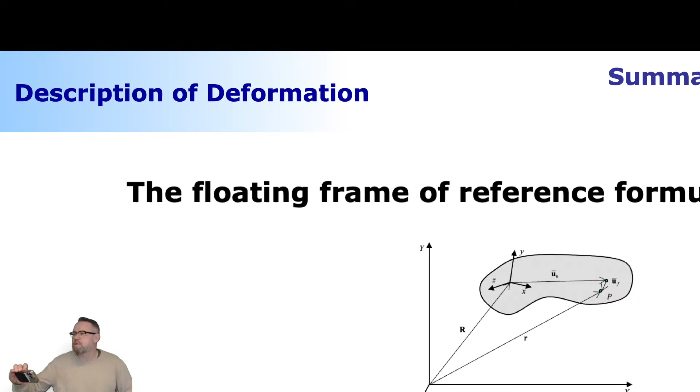Nothing comes out like this. If I say Windows... I don't want to use this either. If I use display, it goes like this. Okay, I think it's now finally working properly. Yes. But is it cutting? It's a little, yeah, not perfect setting yet. One more thing needs to be done. Like this, and now it's going to be perfect.

Okay, so the projectors are not working, mics not perfect, but we don't care, we're still gonna go.

I was about to explain that we're going to make a combination of finite element modeling by describing the deformation you see here. If you take a close look at how things are here, you have the particle's original location, described by vector u bar 0, and then there is something that describes the deformation, which is u bar f. This u bar f is the one coming out from the finite element modeling. Now, important lesson: this u bar f is with respect to the body reference coordinate system.

So when you do it like this, finite element modeling does not need to care about large translations or rotations, which is great because finite element modeling, as described here, is unable to describe large rotations. It can describe large translations, but if you look at the kinematics this is based on, it just cannot describe large rotations. It can describe small deformation and small rotation with respect to the body reference coordinate system. There are specialized finite element codes where large rotation can be accounted for, but in its conventional form, finite element modeling cannot take that into account.

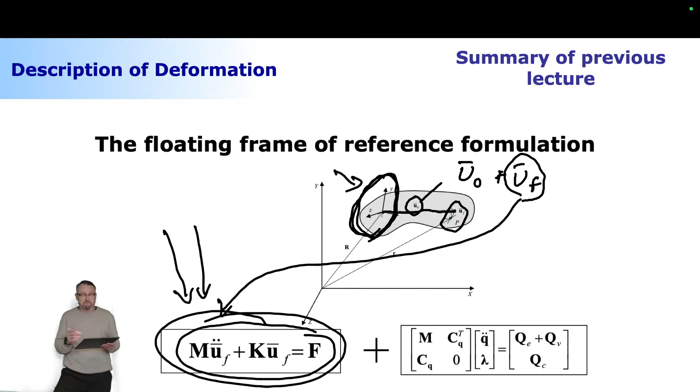There are actually several different ways that you can force finite element models to describe large rotations, and again, the most common source of nonlinearity is large rotations. So the conventional finite element model is not very good at describing large rotations, but that's fine, because those will be accounted for by using multi-body system dynamics. That's the way to go.

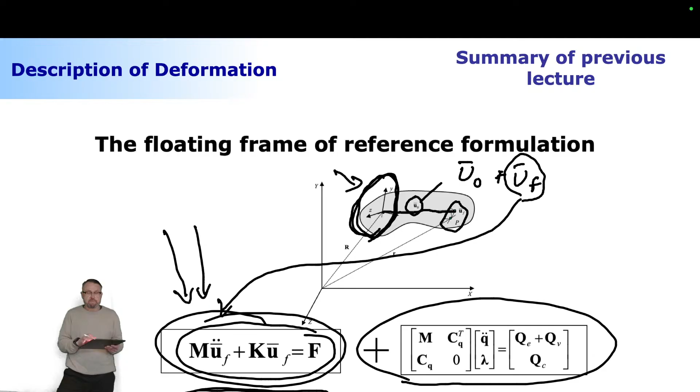We learned that finite element modeling is typically based on polynomial expansion. It could in theory be something other than polynomials, but polynomials are used because they are mathematically very pleasant - easy to differentiate and easy to handle in many different aspects. Maybe differentiation is the most convenient feature, because we do need to differentiate the polynomials with respect to different coordinates, and it's easy to conduct.

Now, how it goes in our finite element modeling: we first need to develop the elements that describe how the piece of structure behaves. A piece of structure is connected to surrounding elements by things called nodes. These nodes have a certain number of degrees of freedom. In the simplest possible form shown here, they can only move left and right, so each node has 1 degree of freedom. This has 1 degree of freedom, that has another, so in total it's a 2 degrees of freedom element - the simplest possible element.

What you need to do is select the polynomial from your Pascal's triangle such that the unknowns represent what happens between these nodes. Finite element modeling is all about what happens between the nodes. That's extremely important to understand, because sometimes you hear this explanation that finite element modeling only focuses on nodal degrees of freedom and you have no idea what happens elsewhere. It actually came the other way around - you first started to describe what happens between the nodes, and you make them physical in terms of nodal degrees of freedom. So these nodal degrees of freedom are interpretations to see what happens internally in elements. That's what they're for.

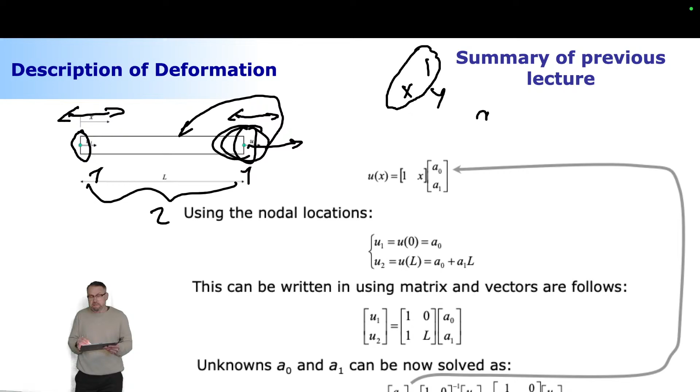They tell you that if you introduce a displacement to nodal degrees of freedom, how do the particles follow that? But in an element like this, we did not start from the nodal degrees of freedom, we started from the polynomial expansion. In the polynomial expansion, we need to select 2 unknowns from the Pascal's triangle as shown here - you select A0, and A1 multiplied by x. If there's an internal node in the middle, you select another component, which could be x squared, or in the next row x cubed, and so on - so then you have more unknowns.

These unknowns will be replaced by nodal degrees of freedom. You replace them by first expressing polynomials and their multipliers as shown in this part of the slide. Then you take whatever information you have about nodal locations into account, and you get the relation between the nodal degrees of freedom and the polynomial unknowns.

Now the next step is solving the polynomial multipliers by inverting this matrix here. Remember the story about when I was struggling to invert the element matrix? That was a 48 by 48 matrix, and that was a miserable time in my life.

So that was when I was a postdoc in Chicago. Eventually I was able to do that, but it was all about how to select these polynomials from Pascal's triangle. And it wasn't straightforward. It was a polynomial where the coefficients weren't selected in a row, but almost randomly.

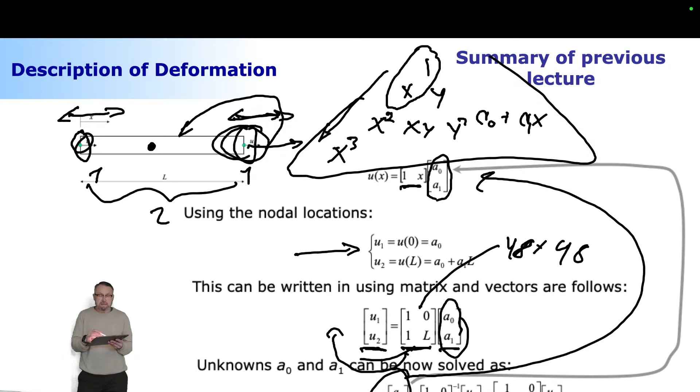Anyways, now I have a 4 degrees of freedom element, so I need to select my polynomial expansion as shown here, with 4 components to make them match. How did I select them? I selected each of them based on this. So if I could change the color here, I selected this one, a constant value, and this one, because if I don't select this, the element isn't capable of moving without introducing strain.

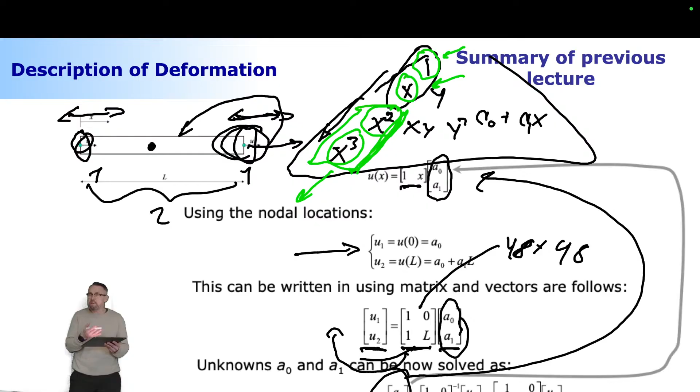This one is needed, because otherwise the element cannot introduce constant strain. The rest you can select the way you want, but I selected this one and this one. Instead of these two, I could select something further down in my Pascal's triangle, and I would get different shape functions describing differently how the element deforms. So in short, shape functions can be considered as the ways the element can deform.

The special feature of the shape functions shown here is that they introduce displacement to 1 nodal degree of freedom at a time. So if you look at this, the first degree of freedom is moving the left end in the y direction. And when you do that, each of the particles will follow this polynomial pattern. This polynomial pattern is significant in the sense that if you compute the slope here, which is my 2nd degree of freedom, the slope here is equal to 0.

As is the displacement here on this right end, that too is 0, and the slope here, when you take a close look, that too is 0. So it's introducing the displacement to 1 nodal degree of freedom at a time.

And what I said incorrectly a week ago, I said that the shape functions are orthogonal, meaning that mathematically they have no relation to each other. That's not the correct statement. That was incorrect.

So the correct one is saying that each of them introduces the displacement to one nodal degree of freedom at a time, and one only. This is the second one, which is the slope. You see that displacement here is 0, displacement here is 0, and slope here is 0 too. This is the way it behaves.

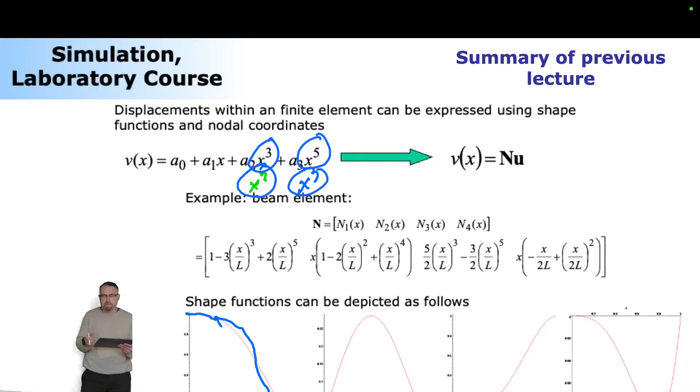Well, I will get shapes that are different than they were earlier. They have a little bit more curving behavior compared to what I got a little while back. So you can kind of manipulate the way the element can capture the deformation. This may not be clear to you, but if I make a comparison, this was based on x power 2 plus x power 3, and this was x power 3, x power 5. You see that this is more violent deformation.

Which one is performing better? It's a little hard to tell, but in element technology, many of the good elements are based on polynomials that are not selected in a row. These are non-harmonic - I don't remember what they're called because it just disappeared from my head. But the risk you might take when selecting this type of polynomial is that your convergence may not be from one direction only, but might fluctuate a little bit.

Yeah, this is something I need to explain. This again is the x-axis, which is the number of elements. This is your correct solution. So when you're selecting this kind of polynomials, it's possible that your solution goes like this. Not typical, but in theory it's possible. It's still converging, but not in one direction only.

When you have a typical displacement-based element like this, it's always converging from the rigid side, like this. Rigid side means that if you have not enough elements, your solution is deformation-wise lower than the accurate value. So it's almost stiffer than the actual behavior. It's always approaching from the stiff side, which in some sense is a safe solution.

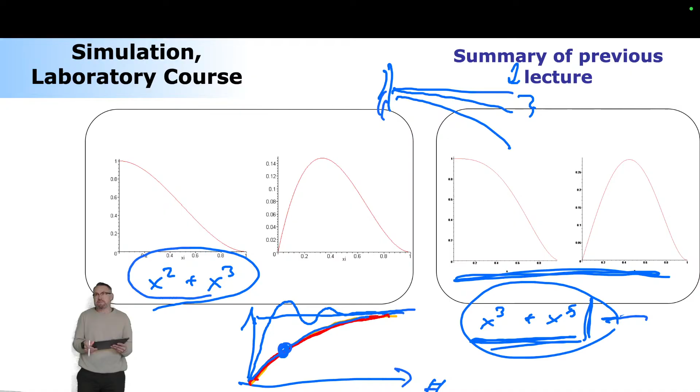All right, now my first in-class quiz: what is the physical interpretation of shape functions? The options are: shows the way an element can deform, defines the rotation of the particles - revisiting something that was my favorite in simulation of mechatronic machines - defines strain displacement relationship, or no clear interpretation. Those are the four choices.

Let me just double check. I'm a little scared to touch this computer because it's kind of...

Okay, so I got comments that the voice is not great. I hope that it's still understandable.

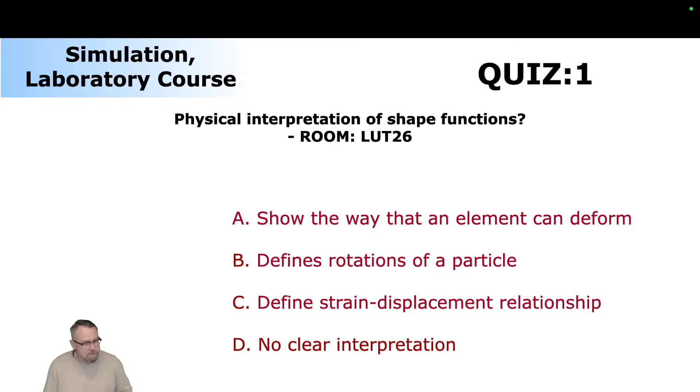All right, I will leave you guys to think about this, and I'm going to go back to my PowerPoint presentation. Now here comes the main lesson of today. What we can do with finite element modeling is put together something called equations of motion, limited to small rotations, and it consists of several components.

It consists of inertia forces, which is mass multiplied by acceleration. It consists of something we have not learned earlier, called elastic forces, which is stiffness multiplied by displacements. And then the last component on the right side of the equation is external applied forces. So this is the dynamic equation.

This is a dynamic equation to study structural strength. In structural strength analysis, it's very common that the inertia component is ignored, and we're only looking for statics. In a case like this, the equation or equilibrium reads like this. I'll just call this F, meaning these are the external applied forces.

So what we do in finite element modeling is invert the stiffness matrix, and when we do so, we can solve for the displacement. Displacement can then be used to get the strains, and they can then be used to get stresses.

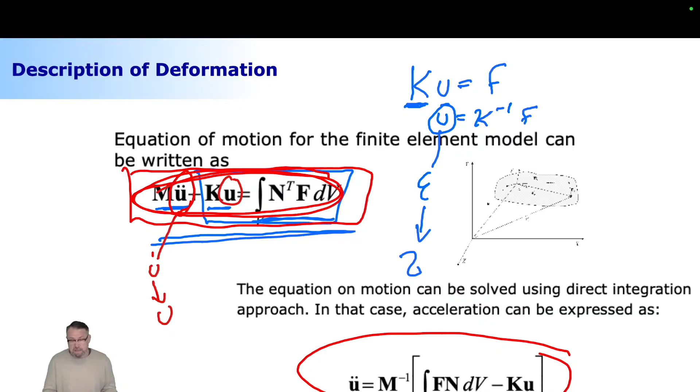This is what I'm going to explain to you next. And I'm going to spend some time to make sure we fully understand this concept, because once understanding this concept, that's pretty much all you need to know from this course, theory-wise.

Again, we cannot make use of this one because the dimensions are simply too high. There are too many degrees of freedom, so it's not going to be easy to use it as it is shown here. It's actually extremely hard to be used like that.

So these are the questions we're going to revisit a little later. So what I will do is jump from nodal degrees of freedom to modal degrees of freedom. And these two spaces are related based on assumed deformations.

So what are the ways that the entire structure is assumed to deform? Again, this is the entire structure, how that is assumed to deform. This is the one that relates these two spaces together, nodal and modal spaces.

All right, so I do have an accent, so I don't know if you can hear the difference between nodal and modal.

Nodal, modal - or is it like... Say, doesn't make a difference. Can you hear the nodal? That's note, modal is a mode. You hear the difference? I'm not sure if I hear it myself, because deep in my mind it sounds like... Okay.

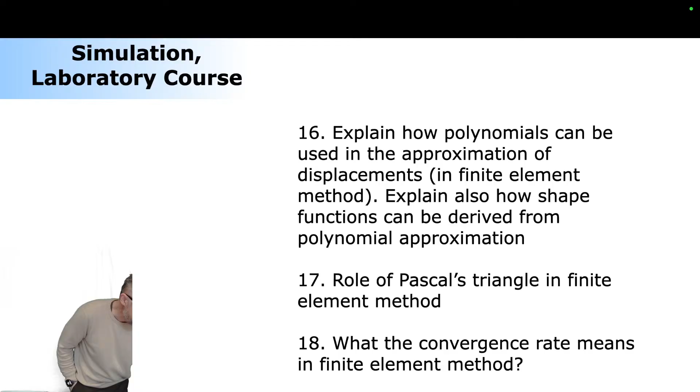In the previous slide there was a power of t to the shape function, but in the second equation it suddenly disappeared - why is it so? Can you say your question again? I don't see this in this one. One slide back, yeah. I see that this is what they are wondering - this transpose operation of shape functions. Yes, the correct way to do it is this one. This is a typing mistake here, so they shouldn't be in this order - they should be like shown here.

You know what this is doing - there is a possibility that you have a structure like this beam-like structure consisting of 3 nodes. It may be the case that the force is not touching any of these nodes, but is geometrically in the middle of these 2 nodes, or let's say it could be 1/3 like here. You need to express this force in terms of nodal degrees of freedom - how can you make that happen? You can do it with help of the shape functions. You multiply your forces with the shape functions, and it divides your forces automatically to your nodal degrees of freedom. That's the purpose of this guy here - let me change the color - that guy is doing that trick.

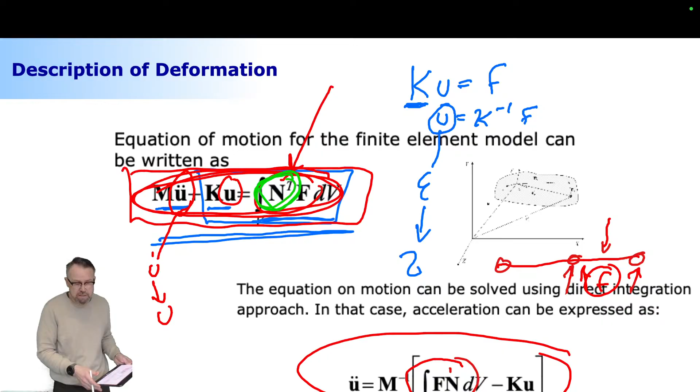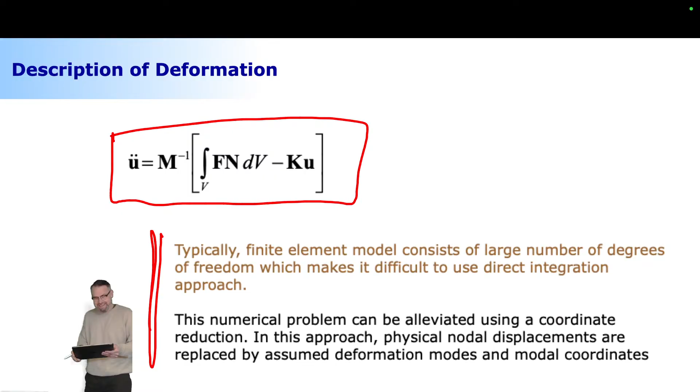Where did you find this comment? Because I don't see this in my slides. No, that was my question. I thought it was somewhere here in YouTube. It becomes emotional again - another happy moment because you're paying that much attention to these slides. Is it okay if I cry? Yeah, just a little bit and then we continue - we can have a small crying break and then continue. Beautiful question.

Now why are these 2 spaces important - the modal and nodal spaces? That's simply because this allows us to reduce the model, because it's possible to get much less modal coordinates than your original number of nodal coordinates. How is this mechanism possible? This nodal vector includes all the degrees of freedom in your finite element model. As I mentioned earlier, this vector can easily consist of 100,000 different components - this ID number could be 100,000. It means the structure can deform in 100,000 different ways, each associated with where the structure can deform. Is it really necessary to know 100,000 different ways the structure can deform? In most practical cases, no - you don't need to know that many. It's enough if you know some of them that still describe the entire global behavior of the structure. When you take that into account, it may be possible to get much fewer modal coordinates than original nodal coordinates.

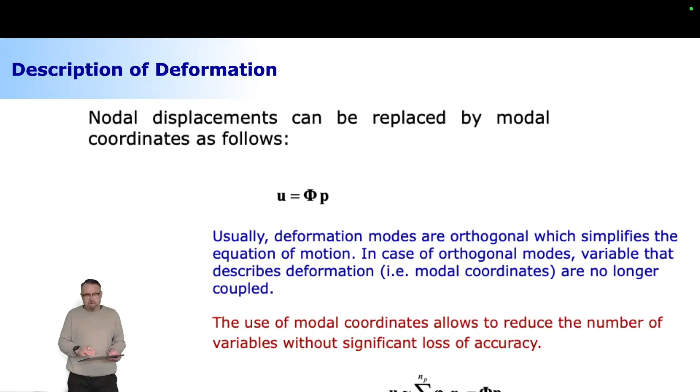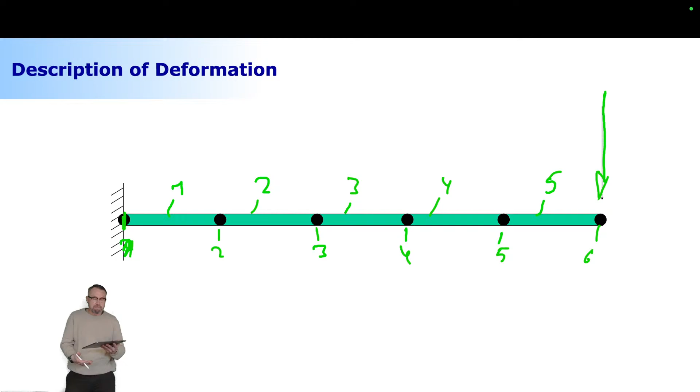I'm going to use this slide to explain what I just said. This is my favorite structure - a cantilever beam loaded by free end, consisting of 1, 2, 3, 4, 5 elements, connected with 1, 2, 3, 4, 5, 6 nodal locations. Each nodal location, modeled using the simplest possible planar beam element, consists of 2 degrees of freedom each, so in total I have 12 degrees of freedom. This kind of finite element has 12 different ways that the structure can deform. What are these different ways? The way that will be very important for us is something that deforms like this - that could be considered deformation way ID number 1. But then there are also deformations where it looks like this.

Because it's possible—very real possible. And what do you think when you have a loading case like this, or a deformation like this? Is it something that you really need to know?

No, you really don't need to know that. But it's still a part of your equation of motion. It is part of this equation here.

So what I do in my modal reduction technique, when I'm moving from nodal space to the modal space, is that I start to ignore some of the ways the structure can deform. I could just assume that probably the one way the structure can deform is going to be like this.

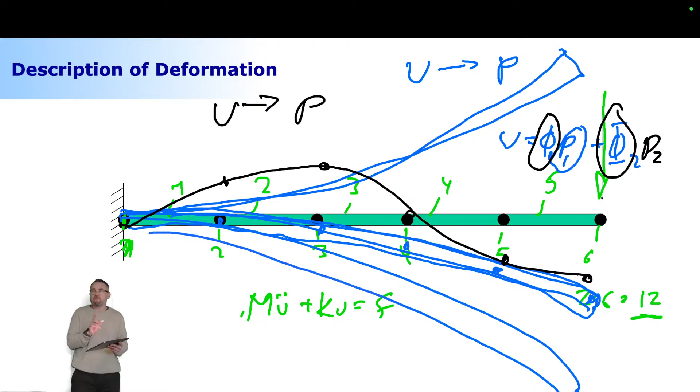So I can collect these ways and amplifications into one single package. This allows me to move from nodal space to modal space, where the unknowns are no longer nodal displacement, nodal degrees of freedom, but modal amplifications. This is extremely important.

So how well are you guys able to follow me so far? Does this make sense? Can you follow me entirely? No problems at all—or some problems? So should I repeat it myself? Would it be okay if I just summarize it one more time? Okay, let me clear this slide.

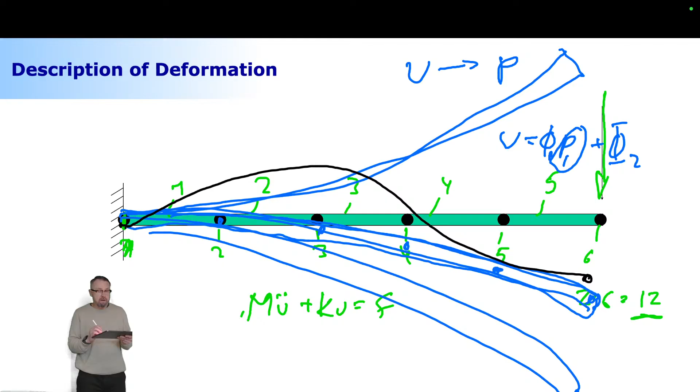Now will be a good opportunity to get a coffee coupon. You just say that you don't get it, I think that you're confused, Aki—so that's going to be definitely worth 2 coffee coupons.

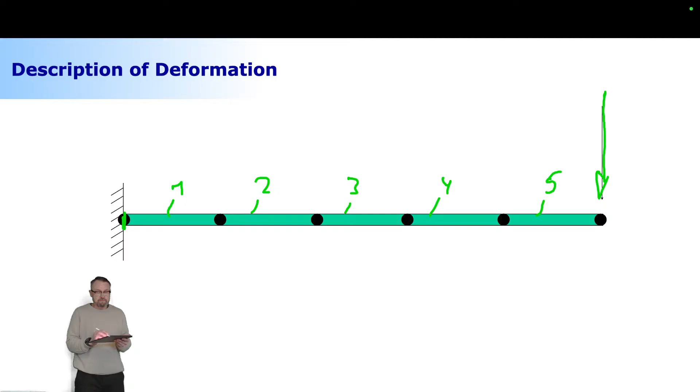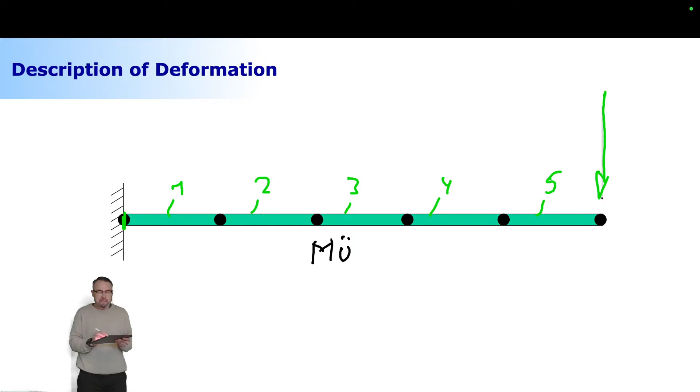All right, so again here's my 5 elements. And when I'm using my 5 elements, I can get my equation of motion, which we can practice a little bit—like how exactly you get these equations of motion. We can practice that next week. So the dynamics of the structure look like this.

This one here is the force that is imposing on one single nodal degree of freedom. So it's quite easy to understand. This is a stiffness matrix. This is a displacement associated to each of the 12 nodal degrees of freedom.

Where this 12 is coming from the fact that I have here a total of 1, 2, 3, 4, 5, 6 nodal locations. Each of the nodal locations has 2 degrees of freedom, so that's a total of 12. This vector here consists of 12 components.

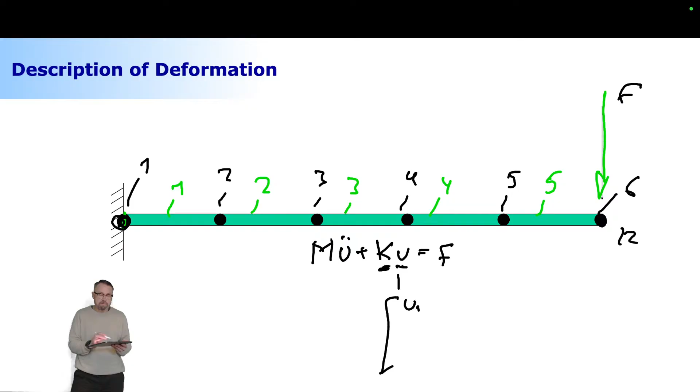Displacement 1, considering this node here in this direction, and rotations which are constrained to the global coordinate, so it's not moving at all. But then the next one is this one here, like how this one was. The second one is a displacement in node 2 in the transverse direction, and so on and so forth.

So this vector here consists of a total of 12 components. These 12 components tell you that, okay, the structure has 12 different ways it can deform—12 different ways.

Maybe I don't need to know that many. Maybe I'm happy with a little less the way that the structure can deform. So what I can do is that I can look at this structure as an entire structure, no longer as a single element, but entire structure. And I can make assumed deformations. Probably the assumed deformation could be like this. This is the way structure can deform. I don't know how much it can deform in this way. It's like one possibility, but how much? I don't know. So I'm calling this way a vector, like this, vector 1.

I don't know what this vector is called, like C, whatever, that doesn't matter right now. It's just that you know it better than I do. Then how much this particular way, this is going to be P1. So it's a multiplication or amplification of this particular way. This is how I can get approximation for each of the nodal displacement. But there's only one way. Maybe I need another way. Maybe I need a third way. Maybe sometimes I need each of these 12 different ways. Maybe that's the case. But typically I don't. Typically I can survive with much less than that.

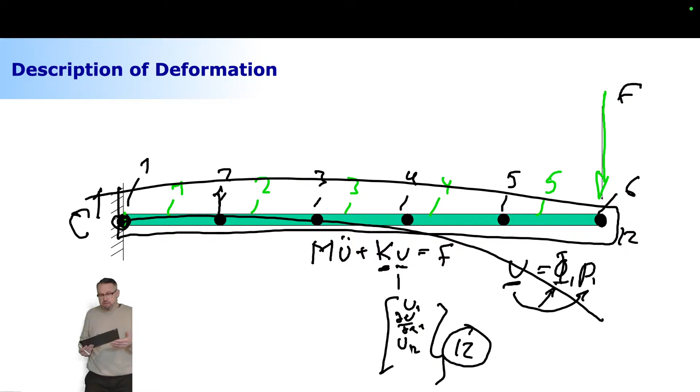Sorry guys that this comes with a little bit of delay. But if I look at my equation here, I have a component that is associated to mass, which is mass multiplied by acceleration. Then I have a component that is associated to stiffness, which is my stiffness matrix. And then I have one more component that is external applied forces.

So when I look at the vibrational properties, first thing that I do is that I don't care about the external applied forces anymore. I just don't care about that. I'm saying that force is no longer considered. It's going to be equal to 0. Equal to 0 means that I'm just looking at the structural properties by using combination of inertia and stiffness, mass and stiffness. That's basically what I'm looking at. Nothing else than that.

Because if you have, where should I put it? Here maybe the good way to put it in a drawing. This is something that they teach at a bachelor level, I believe. So this is a mass and a spring combination. And you can compute the eigenvalue, eigenfrequency. Like what is the frequency? This is this critical frequency.

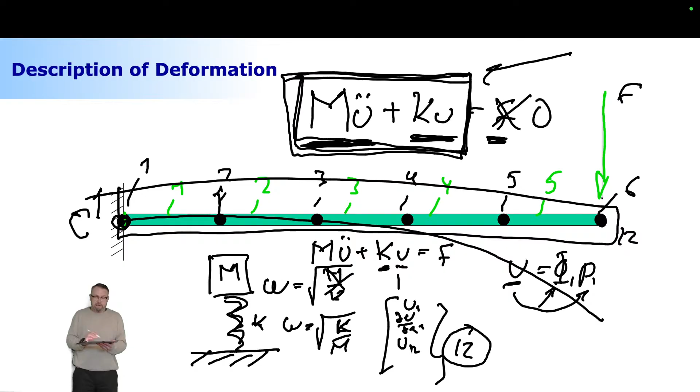Now, this was a 1 degree of freedom system. Our system here, this cantilever structure, is a 12 degree of freedom system. But again, we can solve the eigenvalues, which will be a total of 12 different eigenvalues, and corresponding eigenvectors, which will again be 12 of them, giving us all the features of the structure. And then we're going to handpick some of them, making use of some and ignoring the rest. That's what we're going to do.

All right, so we need to conduct an eigenvalue analysis to get what we call a way the structure can deform. There are other ways that we can get it too, but the most commonly used are the ones based on eigenvalue analysis.

So basically, it goes like this. This is your equation of motion when the force is assumed to be 0. So no forces. Here comes the first very important lesson: what you get as a result of your eigenvalue analysis is eigenvalues, which correspond to the natural frequencies of the structure. Now, if you have 12 degrees of freedom in your system, you're going to get 12 eigenfrequencies.

These are the critical frequencies where the structure starts to go crazy if you impose that particular frequency. And it goes crazy in 12 different ways, numerically. In reality, it goes crazy in an infinite number of ways. But some of the ways it can go crazy are such high frequencies that they're hard to excite, so they really don't matter. Usually the low frequencies matter, and it works like this.

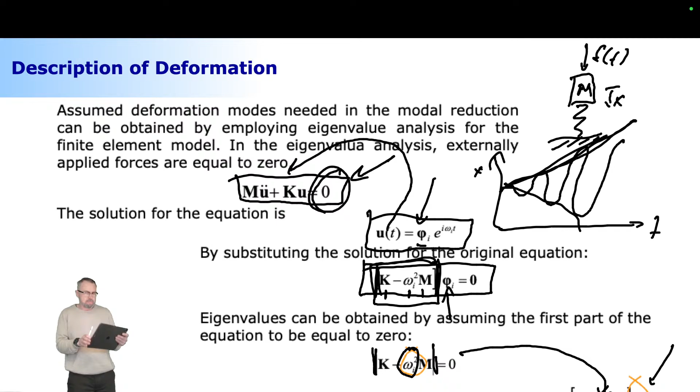Now something I need to emphasize here, and we're going to revisit in Socrative. If you have a structure with 12 degrees of freedom, like this cantilever beam, and you conduct an eigenvalue analysis, you can get these 12 different eigenvectors and eigenvalues - 12 different natural frequencies, 12 different ways it can vibrate. In reality, even this discretized structure has an infinite number of eigenvalues and eigenvectors, but some are such high frequency that they don't carry any practical meaning, so there aren't even ways to analyze those in reality.

You can analyze these frequencies and mode shapes using something called an experimental modal analysis device. It basically relates input and output. The input is something that excites your system, like a hammer, introducing a bit of excitation. Then you measure the responses using accelerometers, or sometimes using laser scanning. There's many different possibilities, but this is a device that tells you structural behavior automatically, so you don't necessarily need to compute those using finite element modeling - you can just measure them using this experimental modal analysis device.

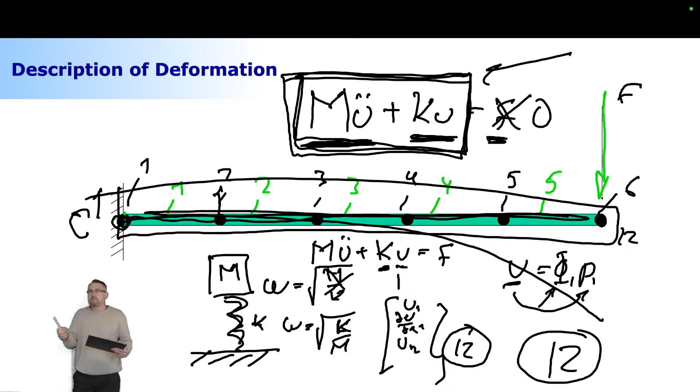I wanted to say that if there are 12 degrees of freedom, that's going to be the number of unknowns in your modal analysis. Okay, and now I'm ready to move on to my in-class quiz.

Now the finite element model here consists of m number of elements and degrees of freedom. It was pretty much similar to the cantilever structure we looked at - it had 5 elements, 5 nodal locations... actually 6 nodal locations, and 12 nodal degrees of freedom. The model can be used to solve how many eigenvalues in theory? It's going to be either the number of elements, the number of nodal degrees of freedom, number of elements minus nodal degrees of freedom, or number of elements added to nodal degrees of freedom. One rule is correct, and now I need to go back to Socrative to see how we're doing there.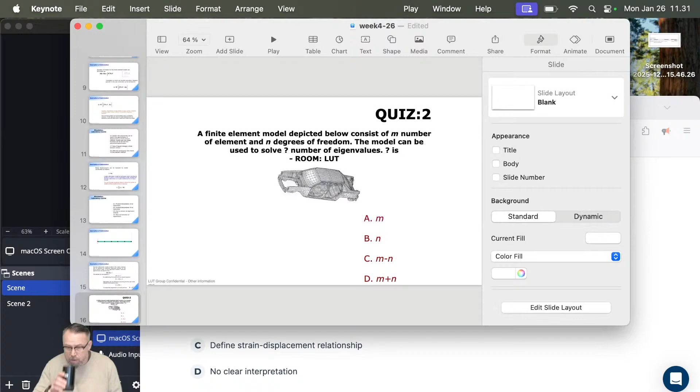There's a major delay, but I'll tell you we got the answers in first, in class quiz, which is a physical interpretation of shape functions. The success rate was 93, which is fantastic. It does not define the strain displacement relationship—that's going to be the kinematic matrix doing that for us. No clear interpretation.

So the interpretation is a little complicated. So anyone avoiding that can get the points too.

Okay, the next one. A finite element model depicted below consists of m number of elements and n degrees of freedom. The model can be used to solve how many different eigenvalues. Here are the options, matched with the options available in my slide.

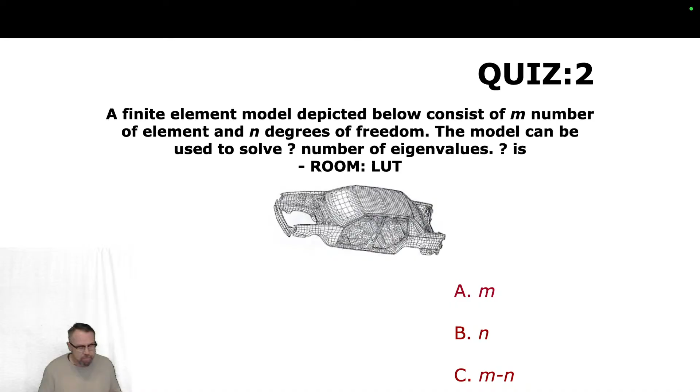So what do you guys say?

Right, so the concept of resonance frequencies I'm sure is clear for you. It basically means what I just explained: if you have a system that can vibrate, when you hit the natural frequency, the vibration becomes very large—in theory, it goes to infinity. In reality it doesn't, because there's always a certain amount of damping in the system. There may be other limiting factors, but basically when you hit the natural frequency, the system starts to vibrate like crazy.

You've seen these examples all over—sometimes you see affordable car suspension systems and the vibration goes crazy. It really hits the natural frequency and goes crazy, particularly if the damper is broken. I'm sure you've seen those cases.

I don't know about this student guild team that went on this long trip using a 400 euro car. Was the suspension okay, or was the damper okay, or not so great? Not that great, I believe.

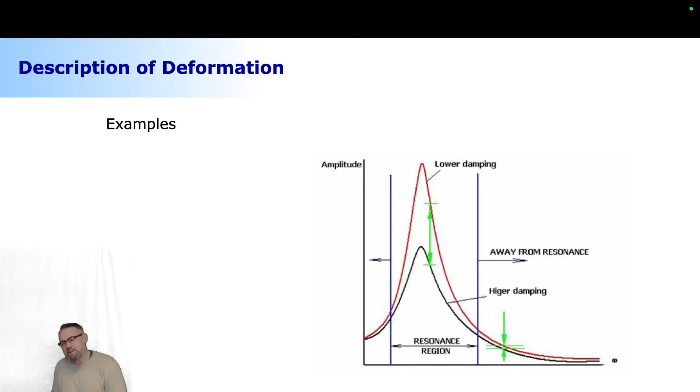Yeah, okay, but anyway, we'll take a look at just a few videos to make sure we fully understand this concept. I'm now willing to show the videos today—I'll send this link to you so you can watch the video on YouTube. I want to keep this volume as low as possible.

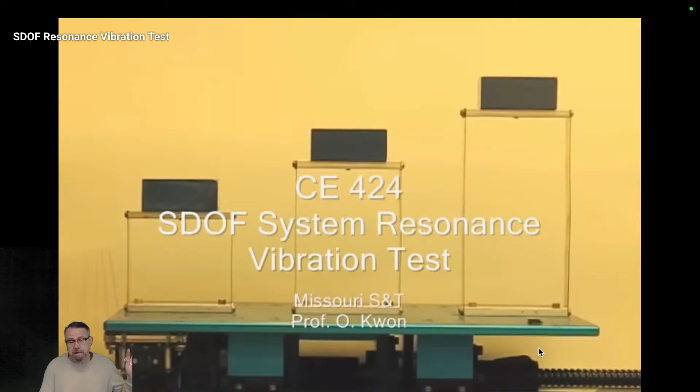Basically, there's a system consisting of different single degree of freedom systems, three of them, each having a slightly different natural frequency, resonance frequency. When you're moving the platform, sooner or later you hit the frequencies of each one, and the response is that they simply go crazy. This motion is in the transverse direction, and right now it's a low motion, but soon the frequencies keep increasing.

First, you hit the natural frequency of the structure located on the right side of the platform. Look at that structure—it starts to have issues, introducing significant amplitude when hitting the natural frequency. The second one is also moving quite a bit. Now it's clear that the one on the right is suffering—the amplitude is increasing, and in theory it goes to infinity. Of course it can't, because otherwise the system would completely break, but this is what the natural frequency looks like.

Okay, so it's at 4 hertz—you see it's pretty wild. As you keep increasing, it damps down. So it's okay if you pass the natural frequency, going beyond it, which is sometimes the case particularly in rotating structures—you have a low natural frequency and want to go above it. If you're not exactly at that frequency, operation is okay; if exactly at the frequency, operation is absolutely chaotic, like you see here. Then the second one hits the same problem again.

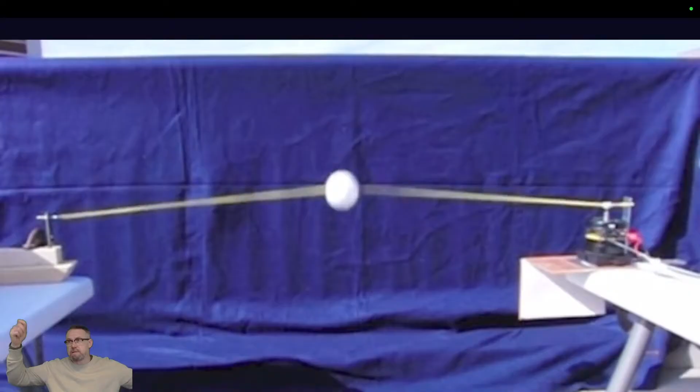So it's getting started. Let me make this a little bit bigger first. So first it's going to show you the system that is 1 degree of freedom, so you can see one natural frequency. The one way the structure can deform, and it's pretty obvious. If it is a beam-like structure, it is like this kind of banana mode that you can figure out. So this is the way the structure can deform.

Then you have 2 masses, you can get to 2 separate frequencies. 3 masses, 3 separate frequencies, so on and so forth. So this is the basics, and I would like you to fully understand this concept.

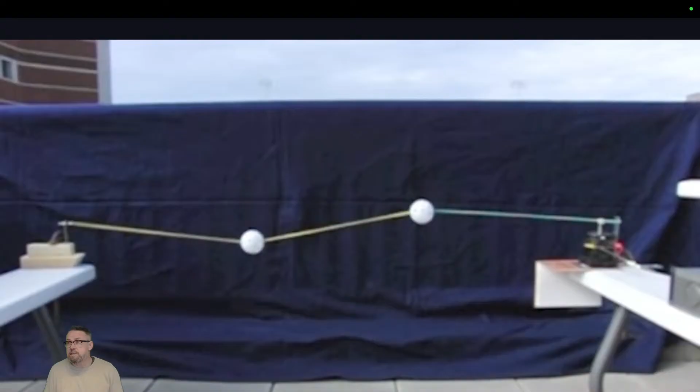I know that it's seemingly simple, but sometimes people get confused about frequencies, eigenvalues, and eigenvectors, and so on and so forth. These are the different ways - now this is the max number of different ways. If you have 3 masses, it's going to be 3 maximum ways. Now what I'm trying to say here is that some of the ways we don't really care about. We just simply don't care.

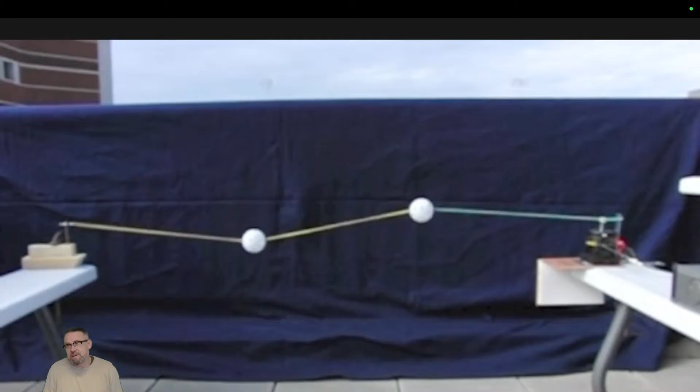It's the same kind of discretization problem, same kind of discretization concept that is used in finite element modeling. Because in finite element modeling, what we do is we break our structure into a certain number of pieces. How many of them? That's a little bit of engineering knowledge. There's no clear answer to say for each of the problems exactly how many you need. But you're discretizing your continuous system to a certain number of points that you are focusing on.

In this case, when it is a cantilever beam, you have 1, 2, 3, 4, 5 moving nodes, then there's one more node here that is constrained. So it's 6 nodes, 12 degrees of freedom. This is the first discretization you're using. The second discretization you can use is that some of the ways the structure can still deform is something you don't care about. You just simply don't care.

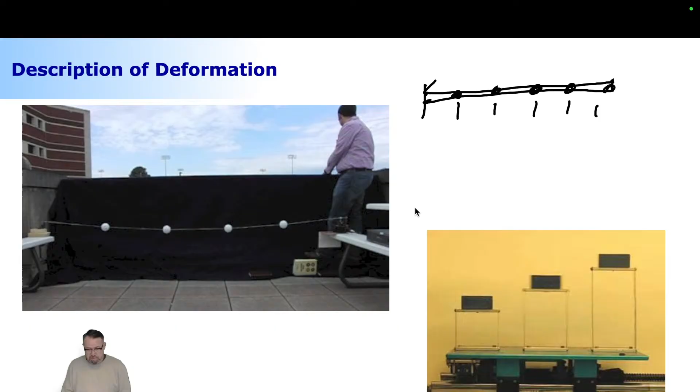All right, here are a few examples about different kinds - let me see if these are willing to play. Why is the video not doing so well today? Okay, you can play this now. No - oh, it is playing. It is playing, sorry, it doesn't play here on my iPad, but it plays on your screen.

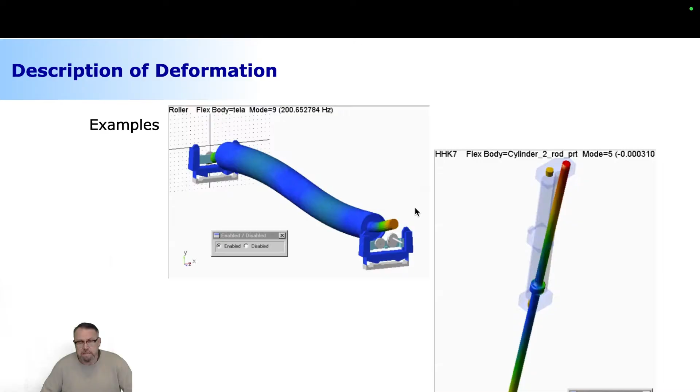What I wanted to show you here is that there are two different kinds of structures. One is a paper roll that is used in a paper-making process, this is something called a tube roll, so it's not having any special features whatsoever. This is one of those dumb rolls, it's just a roll.

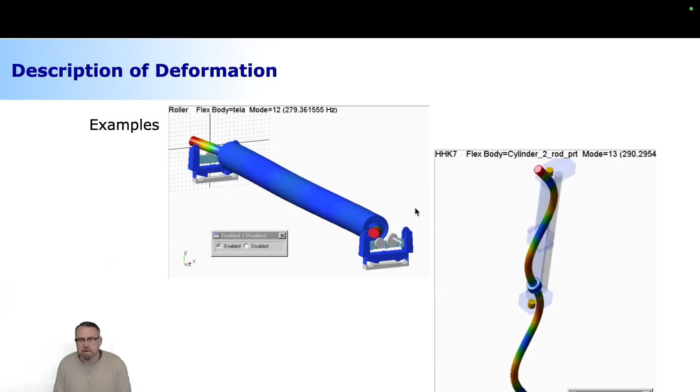But what we do here is conduct an eigenvalue analysis, to see what are the ways that a structure can deform, and the associated frequencies.

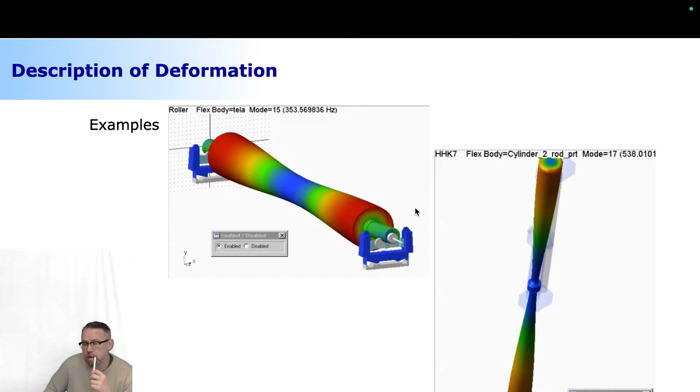And another example you see is a hydraulic cylinder, where the cylinder rod is considered as something we are interested in. So we're conducting eigenvalue analysis for a cylinder rod, and looking at what are the deformation modes and associated frequencies.

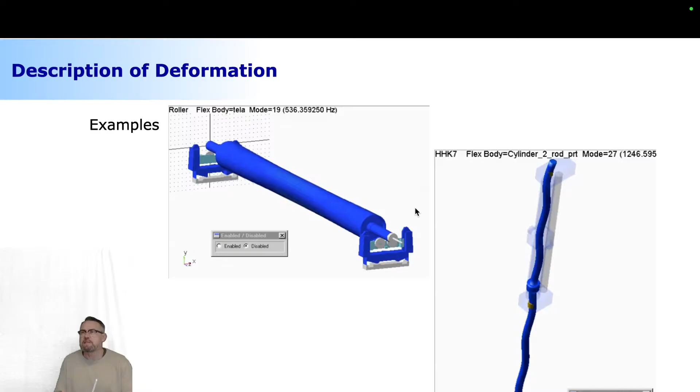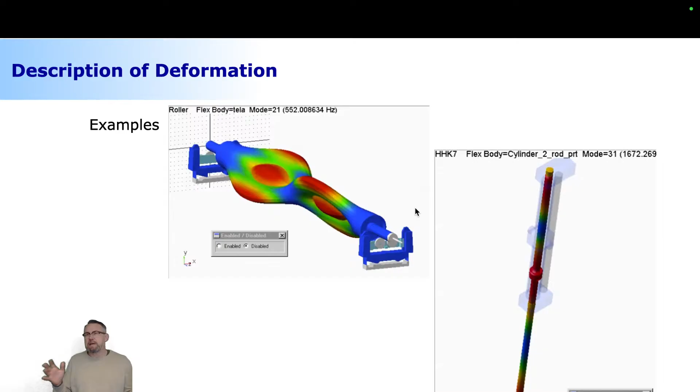My point here is that there are many different kinds of deformation modes. Some of them become easily very exotic, something that doesn't need much engineering sense to say that they really don't contribute anything at all. Because we're kind of adding up these contributions, and some of the contributions become insignificant. And when they become insignificant, you can say, hey, your contribution is so little that I don't care about you, go away.

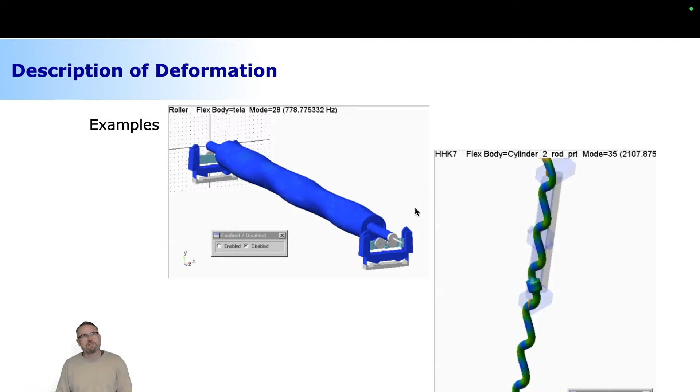This is like the most severe working environment ever, because each of the modes have to contribute, and if not, they have to go home. We're gonna ignore them - what do they say now, in some of these reality shows, you're fired. We're gonna fire them, we're gonna let them go easily. So if they don't contribute, we're gonna let them go.

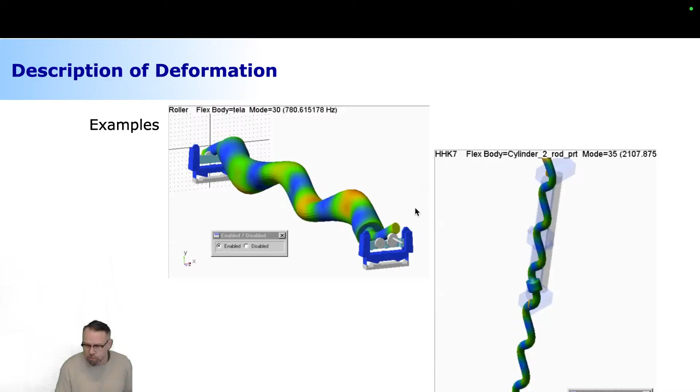Here's an example of how things become really exotic. These deformation modes you see are each like something you'd expect to see in real life. Particularly if you have a loading at the free end of the structure, it's easy to see the deformation, something similar to this. If you look at the frequencies, they're like 51 hertz, 147 hertz, 109 hertz - fairly low frequencies and fairly reasonable looking deformation modes.

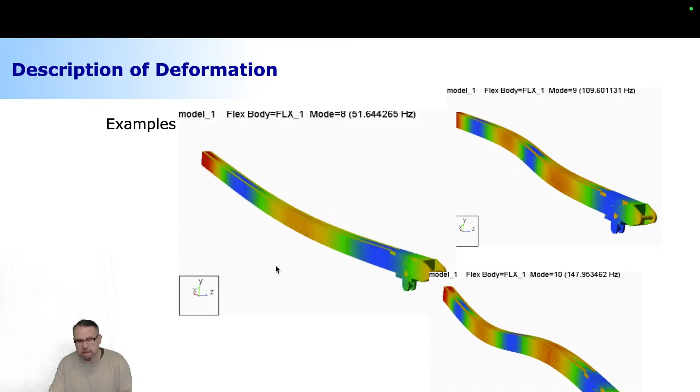But if you go higher and higher, soon you're going to get deformation modes that look like this - where is it - like this.

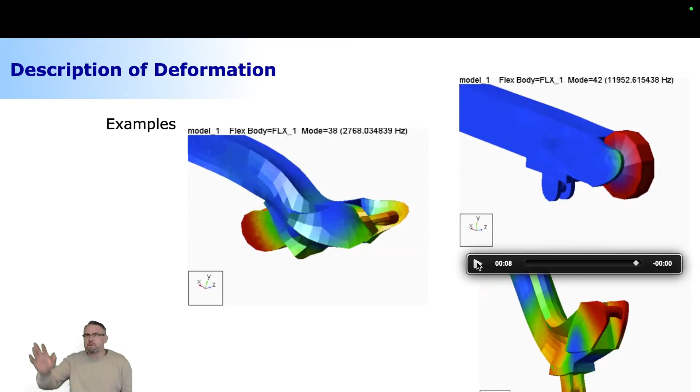In the upper right corner, there's a deformation mode associated with a frequency close to 12,000 hertz - extremely high frequency. If you think about the overall performance of the structure, can you live without knowing how this joint axis is expanding? Doesn't make any difference whatsoever. How would you even excite a deformation mode like that? You just can't - it's practically impossible. So you can ignore it, forget about it. It's contributing very little to the overall performance, so we can simply ignore it.

When we do that, we can reduce the number of degrees of freedom in our original finite element model. Here's how it happens - and I see there's a typing mistake that was here last year too, but I'm going to explain this to you, and then we're going to take a look at the in-class quizzes.

How many wonders do we have in this planet? Was it like 7 wonders of the planet? When I was in your position as a master's level student, my professor at the time said this is the 8th wonder of the world - a miracle that happens next, because what we do when we're reducing the model size is going to be very surprising.

So we created this relation between the nodes and modes. Let me try to make this as good a drawing as possible - this was the way we did this whole story.

So we have the entire behavior described by nodal degrees of freedom, which breaks down to the actual global structural behavior. The global structural behavior is described by deformation modes and corresponding amplifications. Deformation mode 2 and its corresponding deformation, and this is the last one we're taking into account. Summing up each of these notations, we can create a relation like this.

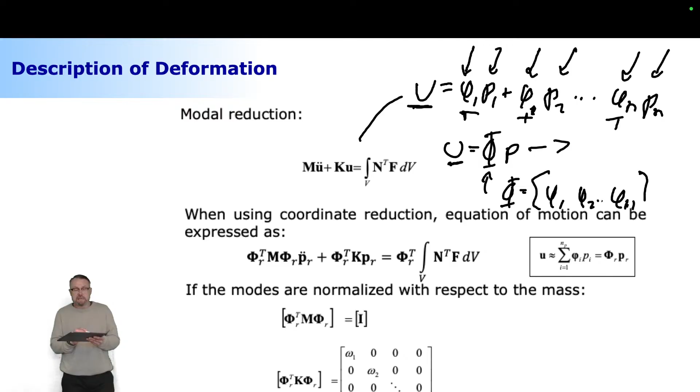Now when we're moving from this nodal space to the modal space, the following happens: we can substitute this information here, and we get this - p dot dot relation because of the linearity, and F. We still need to multiply this one more time with the transpose of the modes, because this is still expressed in terms of nodal degrees of freedom. Of course, this has to be expressed in modal degrees of freedom. When I do that, this is what I get.

So this is the ways the structure can deform, as a transpose operation, times the amplifications. Of course, here the one that's missing is this one, and this is what the entire system looks like.

The beauty of getting these deformation modes using eigenvalue analysis is that these deformation modes are actually orthogonal - and this time they are really orthogonal. As a result, you get a reduced size of the structure, but the reduced size has another special feature: whatever is left is going to be a diagonal representation - you're essentially deleting the relations between the different modes. That's a very positive computational feature because it simplifies the computing quite a bit.

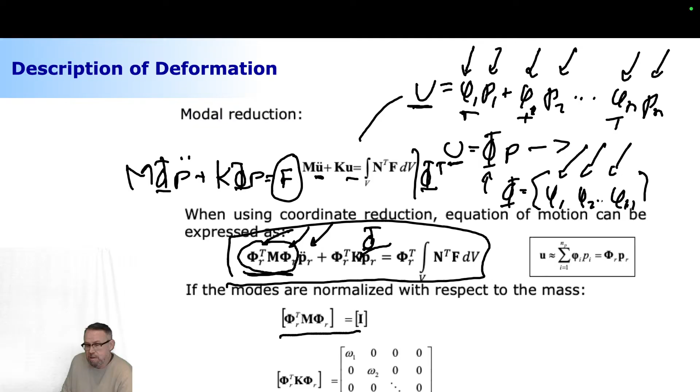But I'm going to close here today, and before we go, let me take a look at our results. Okay, 37 answers, and the correct answer is, of course, B. Very good - we got a 92% success rate, which is fantastic. Good thing. All right, with this, I'm going to close streaming.